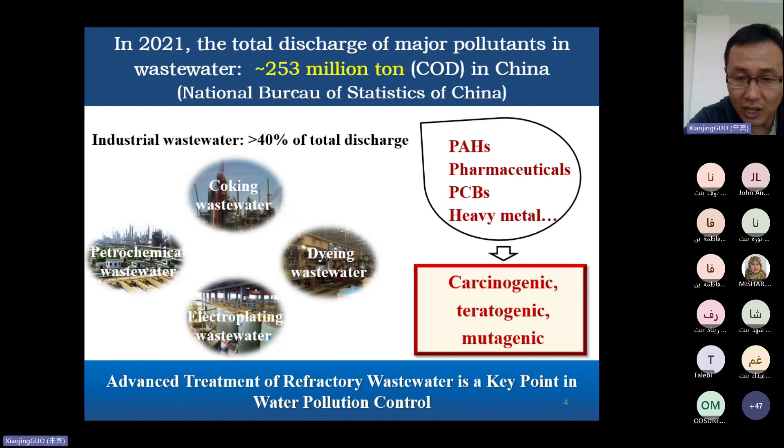To now, advanced treatment technologies can be mainly classified by 3 methods. The first is a physical-chemical method, such as adsorption, coagulation, and membrane process. Second is advanced oxidation processes, such as Fenton oxidation and ozone oxidation. The third one is the combined method.

For these methods, they have some limitations in practice. For example, for the physical-chemical method, adsorption is widely used in the advanced treatment of coking wastewater. However, after the treatment of adsorption, the adsorbents have to be further treated.

Further, advanced oxidation such as the Fenton process has a narrow pH application range. Also, if you would like to get good performance using the Fenton process in practice, usually high amounts of ferrous ions and hydrogen peroxide are required. In this case, larger amounts of iron sludge will be produced, which needs to be further treated.

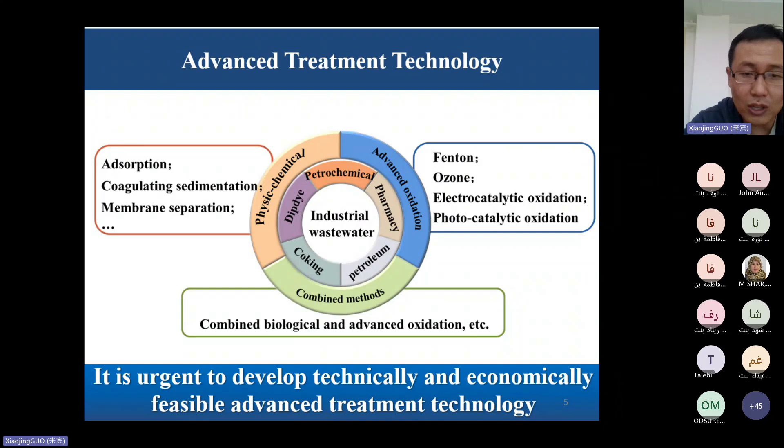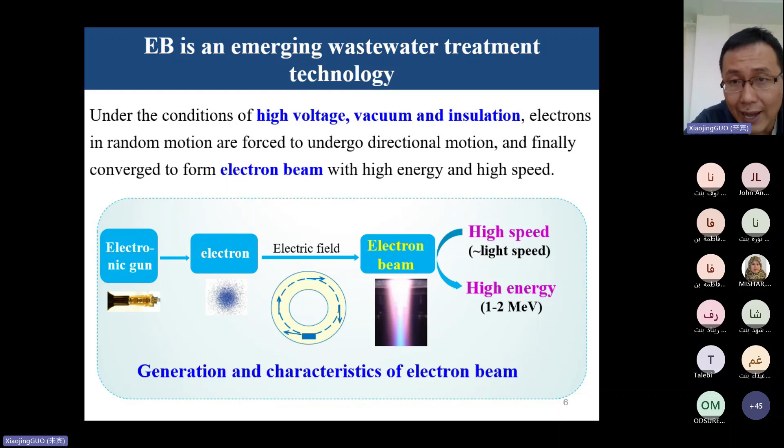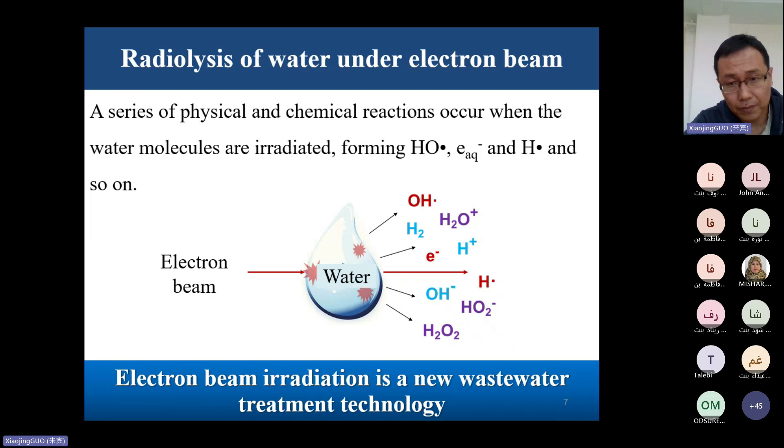These reactive species can react with each other, so during the process of electron beam treatment, there will be a complex transformation relationship between these reactive species. On the other hand, this complex transformation could also provide us a way to regulate the reactive species.

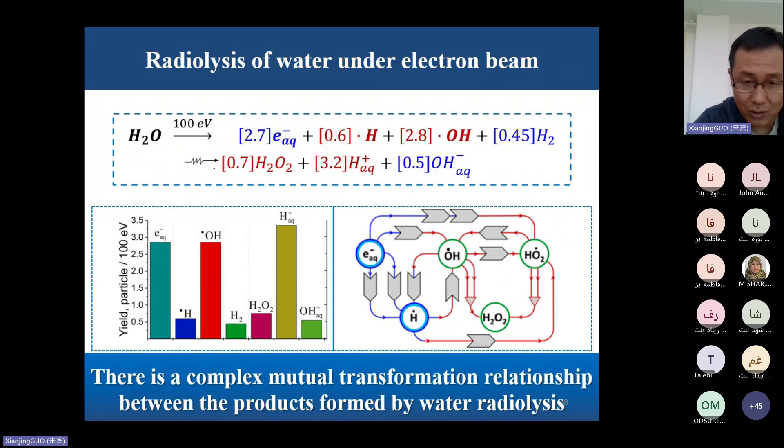Next, I would like to briefly introduce the degradation mechanism of organic pollutants by the electron beam. Usually it includes two ways. One way is direct action, meaning high energy electron beam will be directly deposited on the organic pollutants to make them decompose.

The other way is indirect action, meaning the reactive species produced during the electron beam process can react with the organic pollutants to make them decompose and mineralize. Our previous studies and published references have demonstrated that electron beam can remove lots of recalcitrant organic pollutants, such as pesticides, antibiotics, and chlorinated compounds.

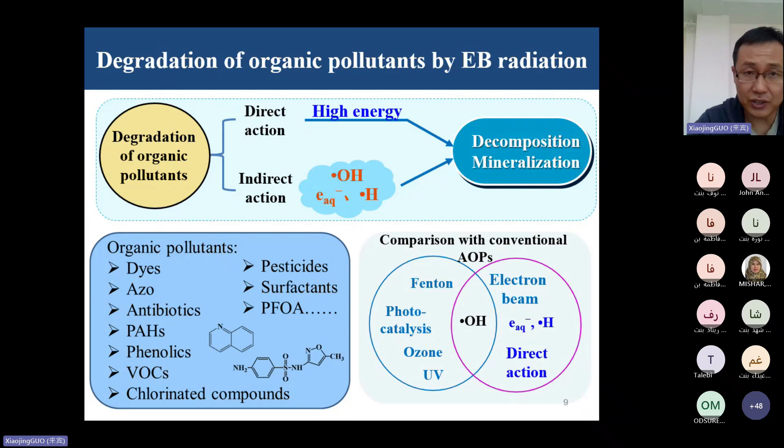For electron beam technology, in comparison with conventional advanced oxidation processes, electron beam can not only produce hydroxyl radicals, but also reducing reactive species, such as hydrated electrons and hydrogen radicals. Also, it has direct action, so in addition to organic pollutants, the electron beam could also remove bacteria, viruses, and resistance genes.

Based on the results of our experiments and actual projects over the last about 20 years, electron beam technology has been included in the national standard in China, and this provides a basis for us to popularize electron beam technology in practice.

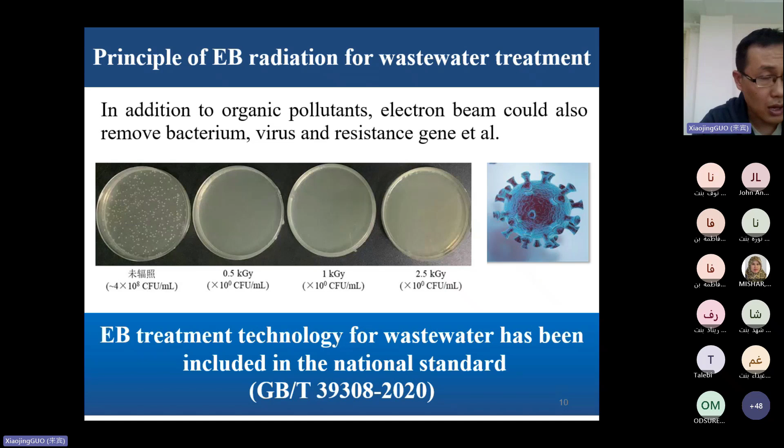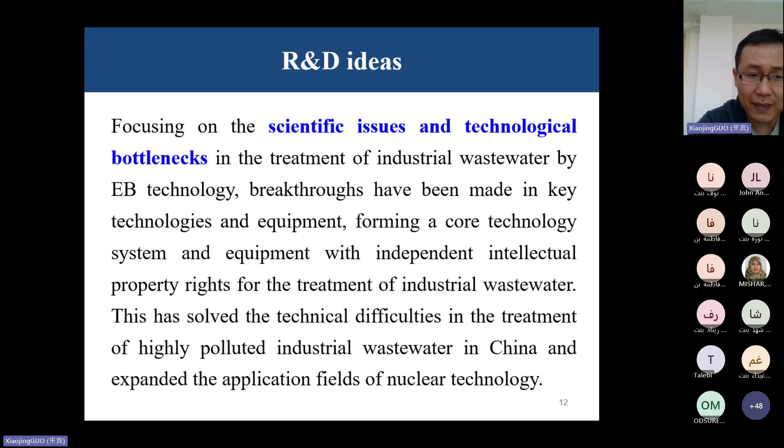I'd like to introduce the research and development process of electron beam treatment technology. At the beginning, our research mainly focused on the scientific issues and technological bottlenecks in the treatment of industrial wastewater by electron beam technology. To now, breakthroughs have been made in key technologies and equipment, forming a core technology system and equipment with independent intellectual property rights for the treatment of industrial wastewater. This has solved the technical difficulties in treating highly polluted industrial wastewater in China, and expanded the application fields of nuclear technology.

We have obtained the main achievements in the following 4 aspects. The first is theoretical research—we made lots of theoretical research about the degradation characteristics and mechanism of organic pollutants by electron beam. Second, we developed the electron beam based wastewater treatment process. Third, we developed special equipment for wastewater treatment. And based on the above 3 aspects, we applied electron beam technology in practice to treat actual wastewater.

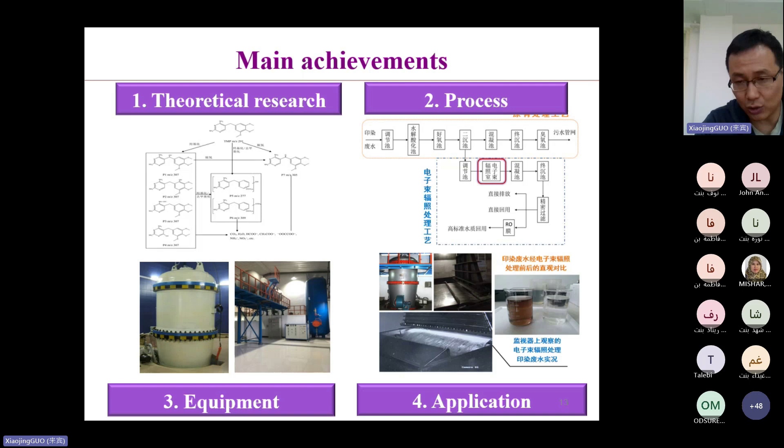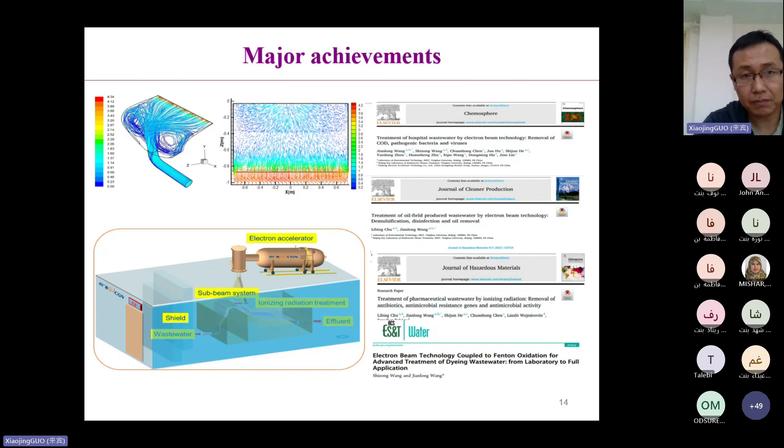This picture shows the main sections of the equipment in practice. In the left picture, this is the control system. The second picture shows the coil used for increasing the voltage. The third picture shows the electron accelerator, and the fourth picture shows the radiation reactor.

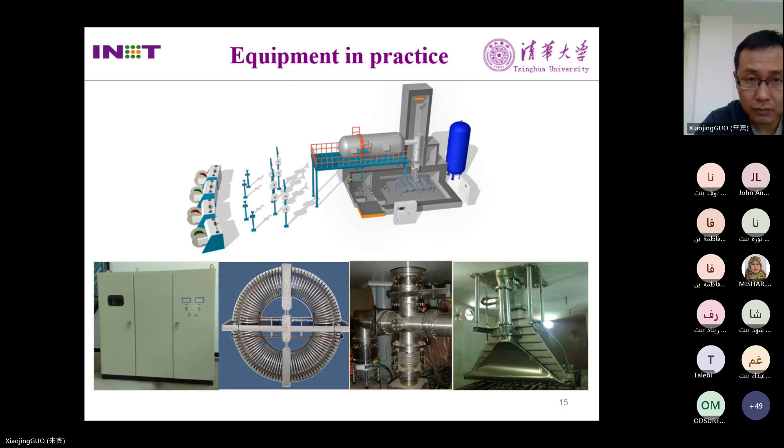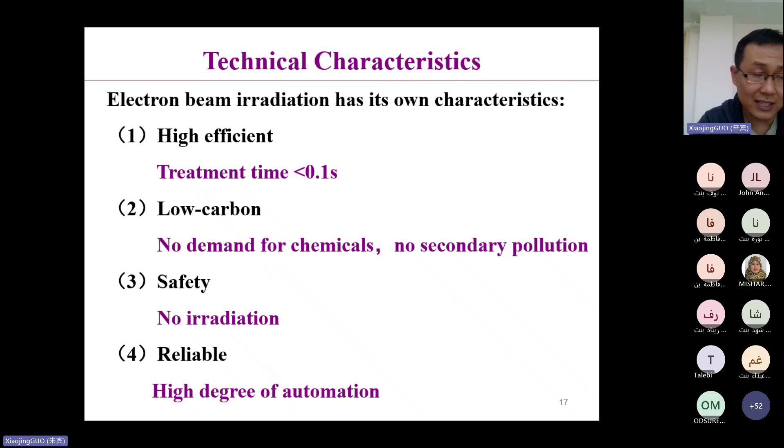Now I would like to introduce the technical characteristics. Electron beam irradiation technology has its own characteristics. First, it's a highly efficient technology—the treatment time is usually shorter than 0.1 second. Second, it's a low carbon technology with no demand for chemicals and no secondary pollution. Third, it's a safety technology—we have developed special equipment for protection against radiation, so there is no radiation at all. Fourth, it's a reliable technology, and the electron beam system has a high degree of automation, so we can easily control the whole system just by pressing several buttons on the computer.

Also, electron beam technology has its own technical advantages. First, high processing efficiency, large processing scale, and high degree of automation. For one electron accelerator, it can now treat as much as 5,000 tons per day.

Second, it has a strong removal capacity and a wide application range. To now, it has been demonstrated that electron beam technology can effectively treat dyeing wastewater, paper making wastewater, chemical wastewater, pharmaceutical wastewater, and so on.

Third, it has a small footprint and a flexible design. Each electron accelerator needs only about 200 square meters of space. Also, in most cases, it can be combined with conventional wastewater treatment, such as flocculation and membrane processing. Lastly, it has a long service life—one electron accelerator can serve more than 20 years.

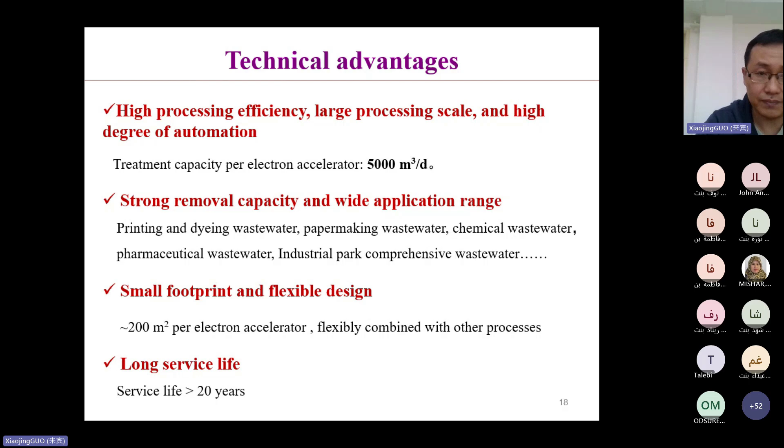Now I would like to introduce the security issues. When we talk to people in factories or companies, most of them care about security issues, especially the safety of the treated wastewater. The safety of irradiation treatment of wastewater mainly involves three aspects: the safety of the irradiation equipment, the radiation protection program, and the safety of the treated wastewater.

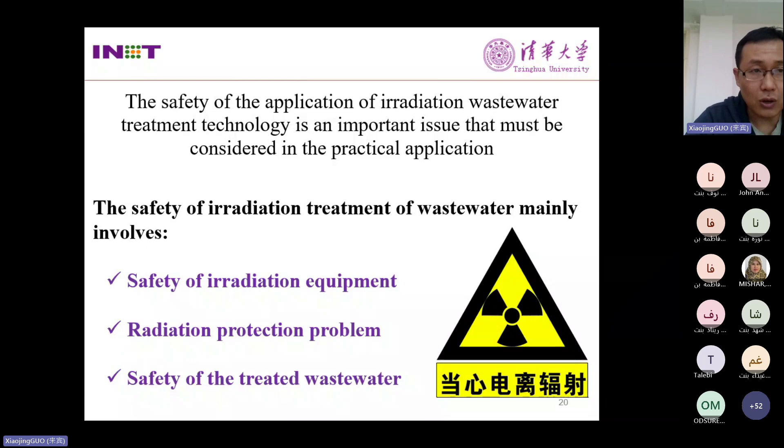For the first safety issue, the safety of the irradiation equipment: each electron accelerator has a reliable method of disabling the acceleration system, meaning we could stop the system immediately if we found problems. We have also built in accelerator and parameter monitoring with remote diagnosis, meaning we can control the system online. On the other side, we also developed shielding for the electron accelerators.

In fact, radiation devices have been widely used in disinfection, such as for food disinfection.

And now there is a mature experience for references. So based on the above conclusions, the safety of irradiation equipment is not a problem.

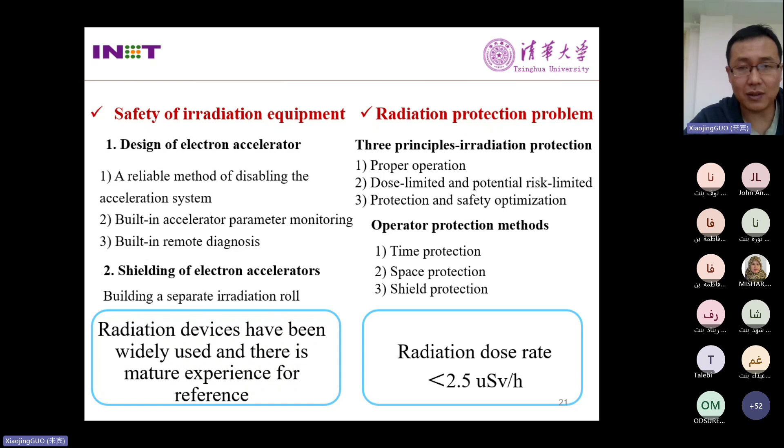The second is the radiation protection problem. For this safety issue, I think each country has its own guidelines for how to operate the electron accelerator. In my opinion, as long as we operate the system based on the guidelines, there would be no problem. So in China, the radiation dose rate should be lower than 2.5 microsievert per hour.

Okay, the last safety issue is the treated wastewater. For this issue, we can give these outcomes from two sides. One is that for common elements such as nitrogen, carbon, oxygen, if we would like to activate them, the energy threshold should be higher than 10 mega electron volt.

In fact, the energy we use in practice ranges from 0.5 mega electron volt to 1.5 mega electron volt. This is far lower than the 10 mega electron volt. From the second side, we also monitor the radioactivity of the treated wastewater. Compared to the radioactivity of the background, there was no obvious increase in radioactivity.

So we could see that the treated wastewater is safe. Okay, for the fifth part, I would like to introduce the application of electron beam technology in the treatment of actual wastewater. Our institute collaborated with CGN Dasheng Electron Accelerator Technology to promote our technology in environmental applications. So far, we have built more than 10 actual projects, such as dyeing wastewater, hospital wastewater, and coking wastewater, and so on.

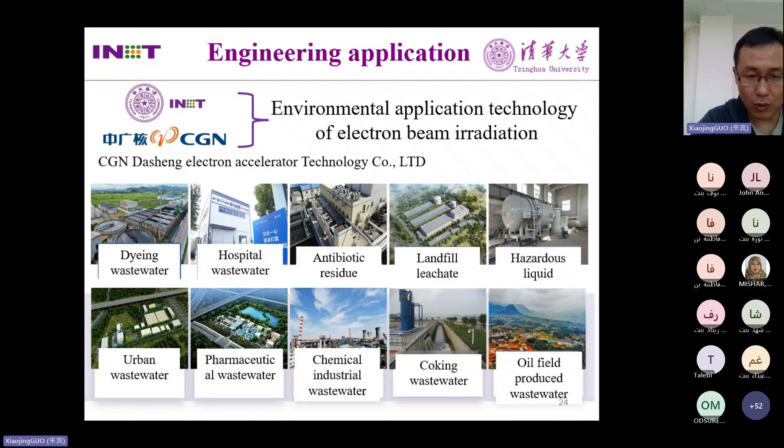Next, I would like to provide some application cases about the treatment of actual wastewater by electron beam. First, I would like to introduce the first application of electron beam technology in China. This project was built in 2017, located in Zhejiang province. The electron beam technology was used to advancedly treat the textile wastewater.

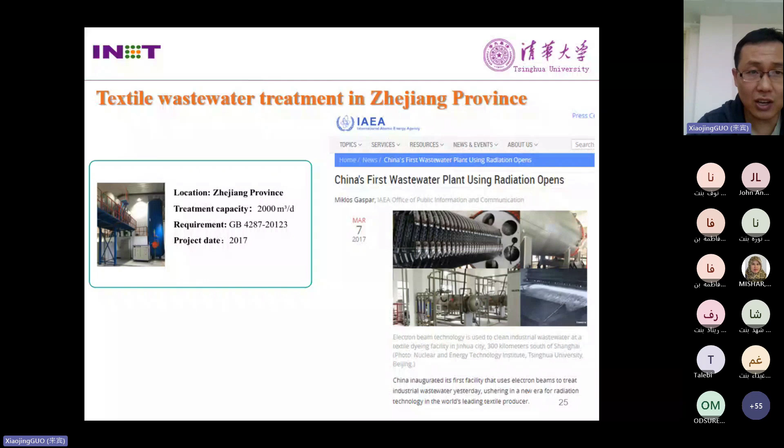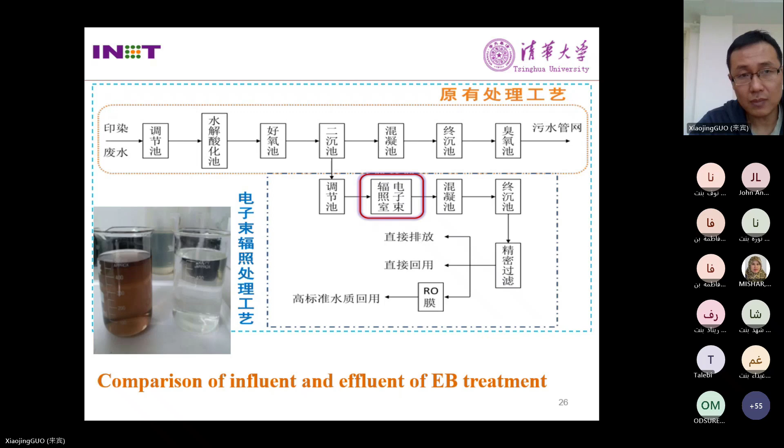Okay, the second application case, I would like to also introduce the treatment of textile wastewater. This project was built in 2020. It's located in Guangdong province. This project was the largest project for textile wastewater treatment in the world.

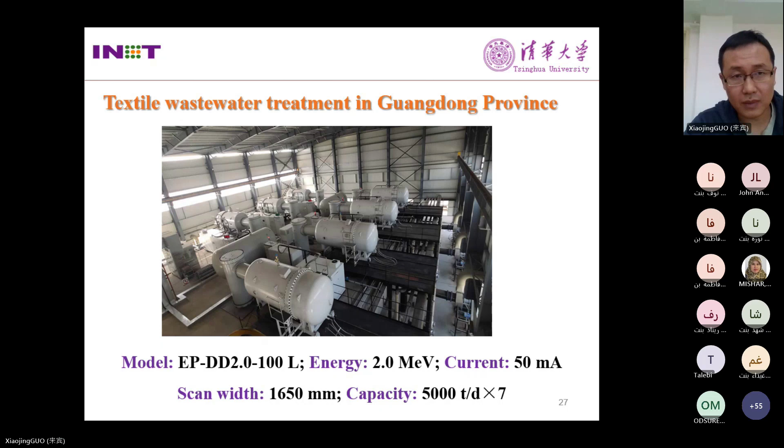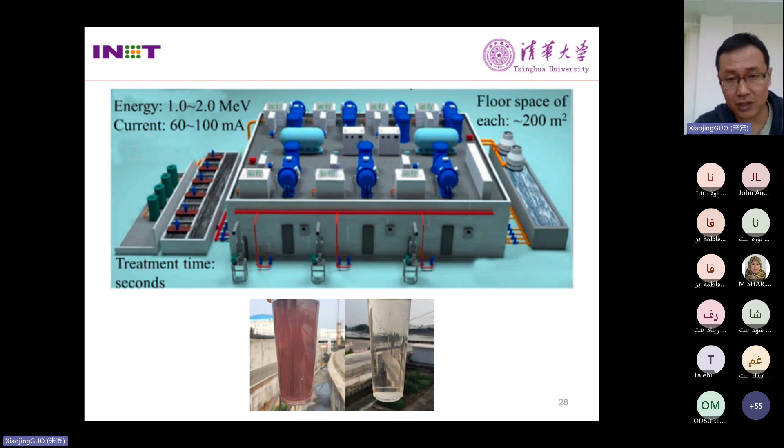About the original process for this factory, the original wastewater treatment used flocculation and RO membrane process as the advanced treatment process. But these treatment processes had two problems. One is that the water quality of effluents was not stable. The second is that the proportion of wastewater reuse was very low.

It's lower than 50%. We upgraded the original treatment processes. We added the electron beam treatment unit after the sedimentation tank, and we didn't change other processes. So after upgrading the treatment processes, the water quality of the effluents was stable, below 50 milligrams per liter. Also, the proportion of wastewater reuse increased to 70%.

Okay, here is an obvious advantage of electron beam technology for the treatment of dyeing wastewater. Different from other advanced oxidation processes, for electron beam technology, the color of the treated wastewater will not return after standing for a long time. So this is an obvious advantage of electron beam technology.

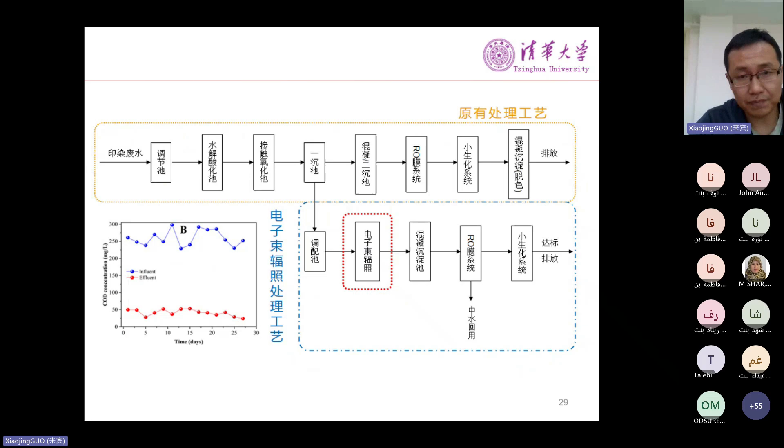And the relevant data of this project has been published in the Journal of Radiation Physics and Chemistry. If someone is interested in this project, please check this paper.

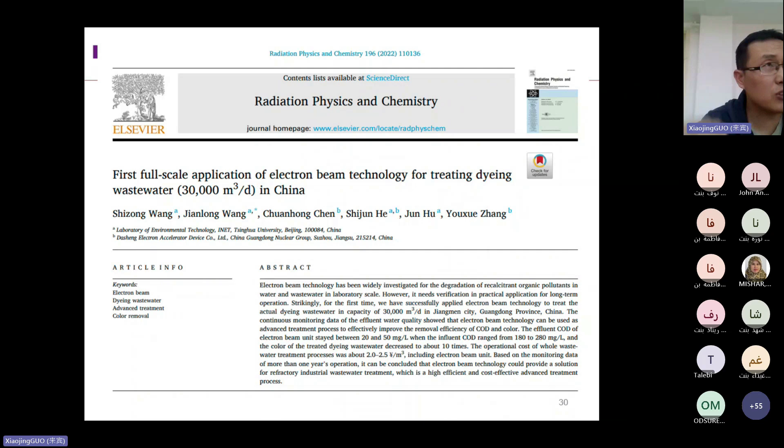Also, during the application of electron beam in treating actual wastewater, we found that in some cases, the water quality of effluents was not that stable because the original wastewater quality changed with time. So to solve this problem, we developed a combined process.

That means electron beam technology coupled to Fenton oxidation. As I mentioned above, the conventional Fenton oxidation process has obvious limitations, such as the narrow pH application range and the large amounts of iron sludge produced. But after we used electron beam technology combined with Fenton processes, we solved these limitations successfully.

For the combined process, the pH range could be expanded from 3 to 9. Also, during the whole process, no iron sludge was produced. So this combined process provided a solution for the unstable effluents.

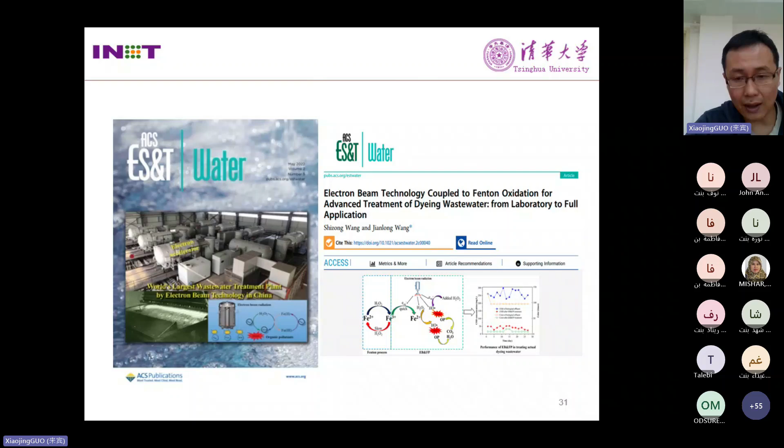And the third application case I would like to introduce: the antibiotic residue treatment. This project was built in 2021. It's located in Xinjiang, China. This factory uses a biological method to produce antibiotics.

After they recover the antibiotics from the water, the antibiotic residue had to be further treated. Studies have shown that some antibiotics remained in the antibiotic residue, so we decided to use electron beam technology to remove the residual antibiotics.

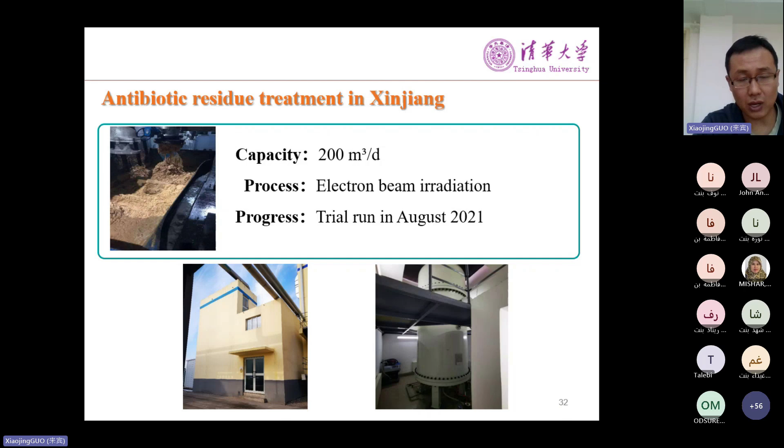Because the antibiotic residue has different properties from wastewater - for example, the antibiotic residue has higher viscosity than wastewater - we improved our electron irradiation reactor. This picture shows the improved irradiation reactor.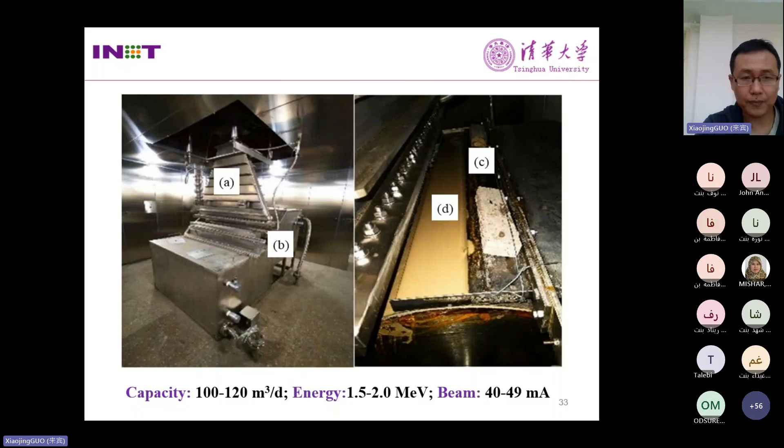After treatment with the electron beam, we could see that the cephalosporin C concentration in the antibiotic residue decreased with the increase of absorbed dose.

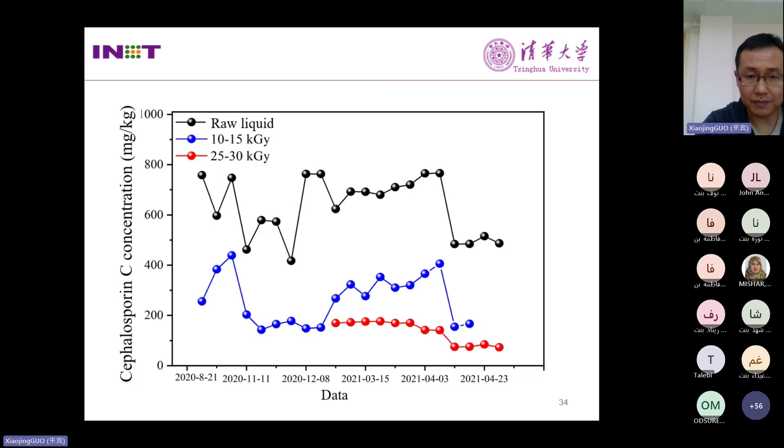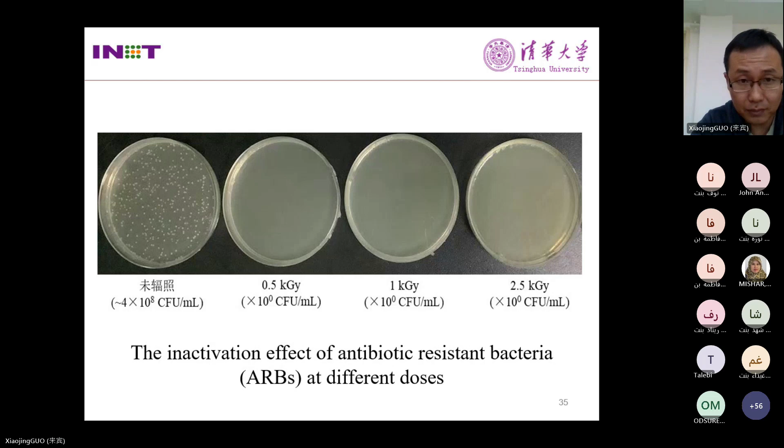Also, we conducted experiments to investigate the effect of electron beam treatment on wheat root length. We could see from the picture that the root length became longer with the increase of absorbed dose.

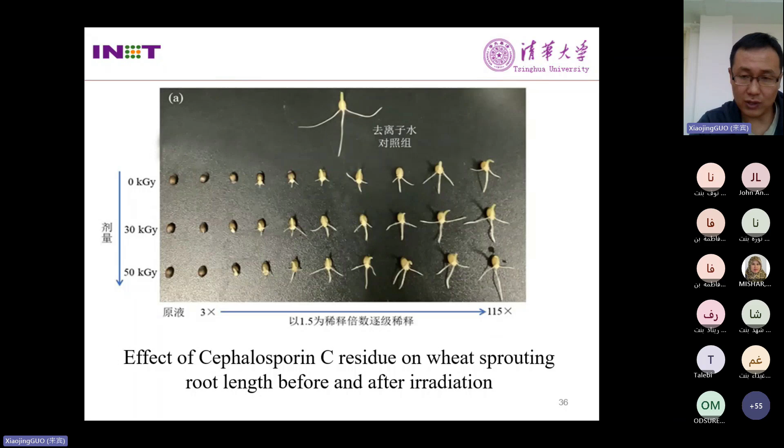Also, we investigated the effect of electron beam treatment on the removal of antibiotic-resistant genes, and the removal efficiency of antibiotic-resistant genes increased with the increase of absorbed dose.

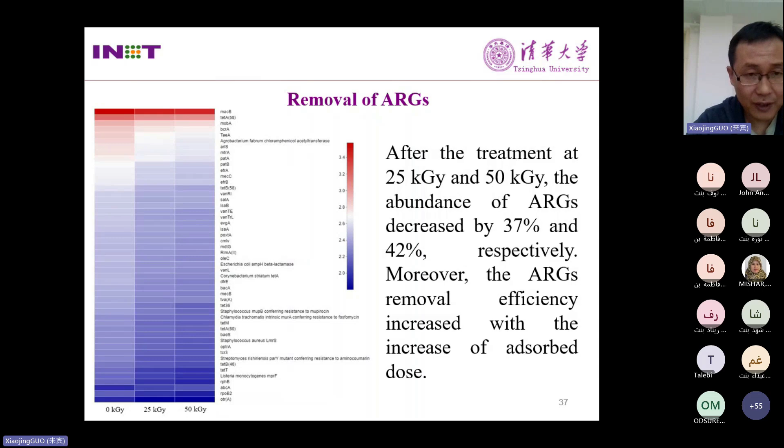The relevant data has been published in the Journal of Cleaner Production. If someone is interested in this project, please check this paper.

The next application case I would like to introduce is the hospital wastewater treatment. This project was located in Hubei province, China. It was built in 2021.

At that time, the coronavirus outbreak occurred in China, and studies had shown that hospital wastewater contains the coronavirus. So from the point of biological safety, steps had to be taken to remove the potential virus in the hospital wastewater. We decided to use electron beam technology to treat the hospital wastewater.

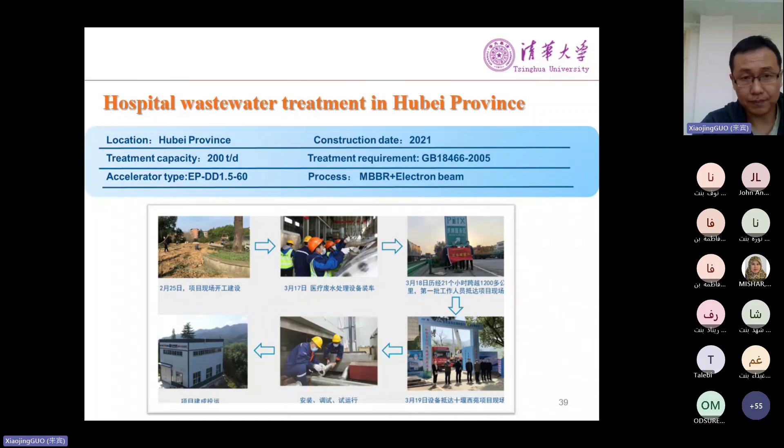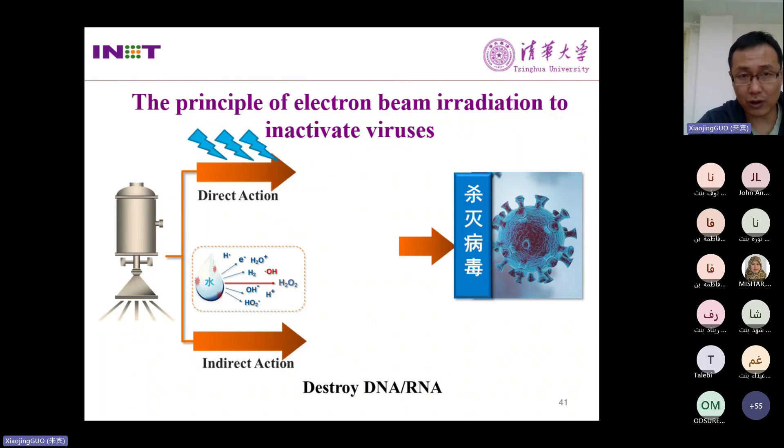This picture shows the electron accelerator used in this project. This picture shows the removal mechanism of the virus by the electron beam, and both direct action and indirect action contribute to the removal of the virus.

The testing results show that in the effluent, fecal coliforms were much lower than the standard limit, and meanwhile the removal efficiency of COD is over 60%.

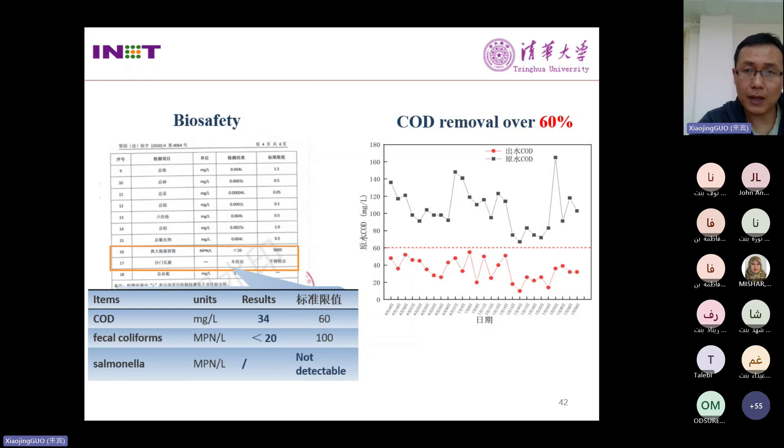The relevant data has been published in the journal Chemosphere. If someone is interested in this project, please check this paper.

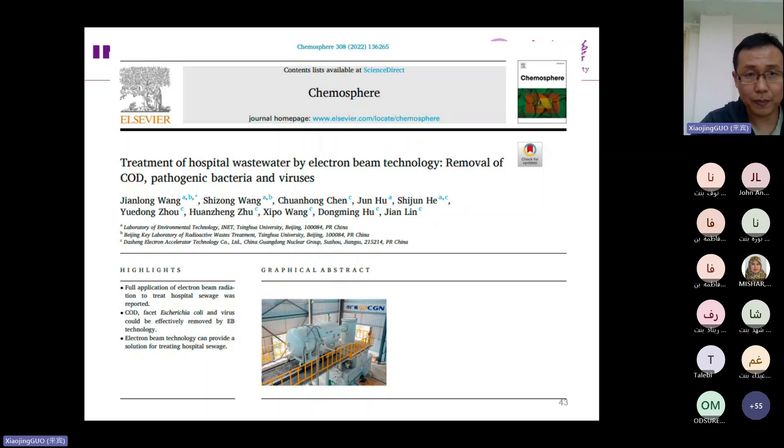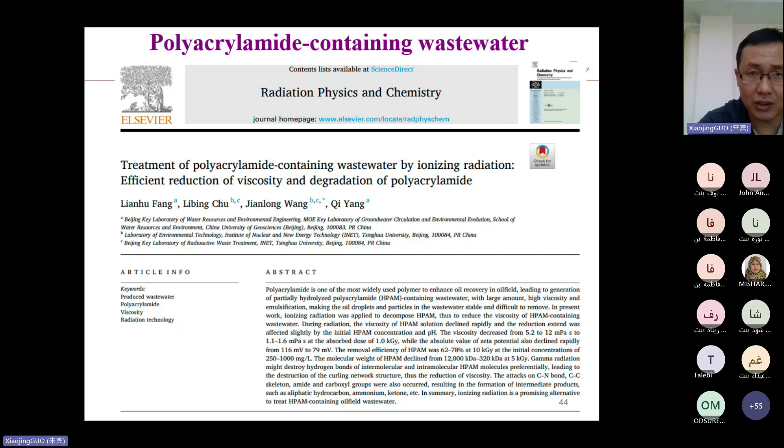In addition to the above wastewater, we also investigated the treatment of polyacrylamide-containing wastewater, pharmaceutical wastewater, antibiotic wastewater, and landfill leachate using electron beam technology.

The last part I would like to introduce is the application prospect. Now our research and projects mainly focus on the advanced treatment of wastewater. In fact, electron beam technology could also be used as a pre-treatment process - for example, it can increase the biodegradability of wastewater.

We made some experiments in the laboratory, and it really could increase the biodegradability of wastewater. It could also be used to kill bacteria or virus in the sludge, meaning electron beam technology could be used for sterilization.

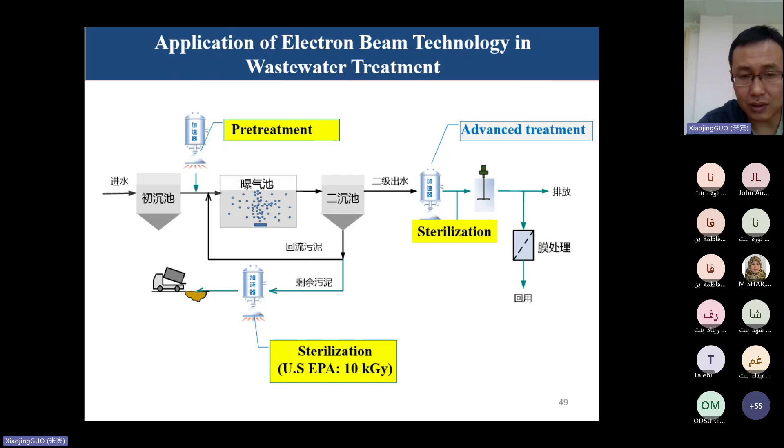Now our research mainly focuses on wastewater. In addition to wastewater, electron beam technology could also be used to treat waste gas, such as volatile organic compound degradation and dioxin degradation, and waste solids, such as heavy metal removal, organic pollutant degradation, and pathogenic microorganism inactivation.

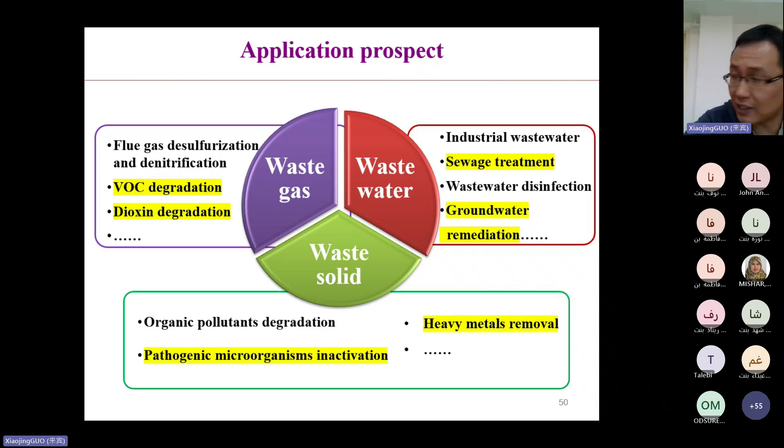Okay, that's all. Thank you for your attention.

Thank you. Thank you, Professor Wang, for the very comprehensive introduction of your research work. We can see that you not only gained a lot of academic achievements, but also applied them in treating different objects.